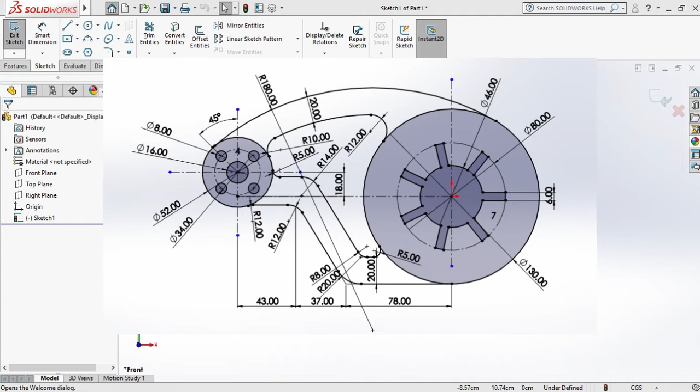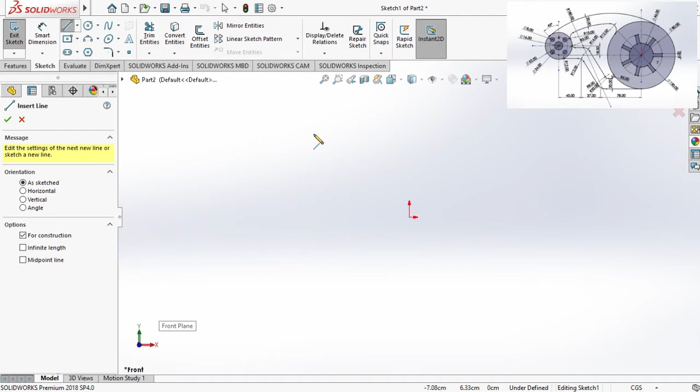So let's start. First, we're going to create a guideline using center line. We're just going to click center line right here, and then I'm going to use the front plane. Press the space bar and select front. I'm going to create a line here, and another line right here. By the way, I use the CGS, centimeter, gram, and second unit system.

Next, as we can see in the figure, we have 43, 37, and 78 on the down part, so we're just going to add them. We get 158, so this will be our guideline. We are going to click Smart Dimension, click this line, and make this 158.

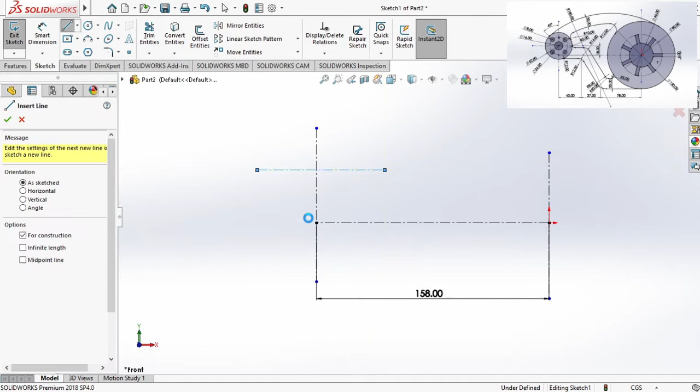Next, we're going to create another set of center lines right here, and another one. Again, we're going to make the Smart Dimension, clicking this and this. This should be 18, so we're going to put 18.

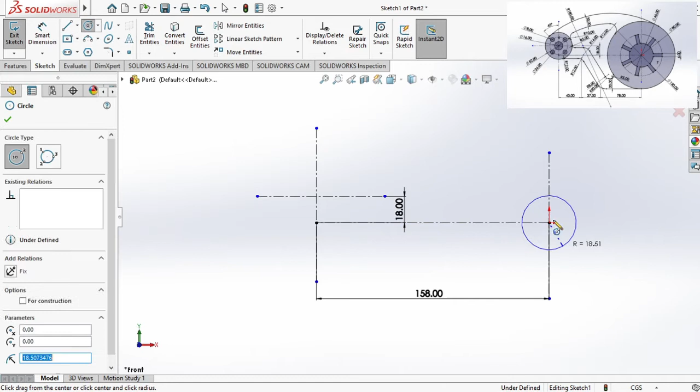After that, we are going to start creating the figure. First we start by doing a circle right here, 3 circles: 1, 2, and 3. To create the measurement that we need, we're going to select Smart Dimension and select the inner circle, which has a diameter of 46. So we're just going to put 46.

The second circle gets 80 as its diameter. Then the outer circle, which is 130 in diameter. So we can adjust this to leave some space right here, and also we can extend our guidelines.

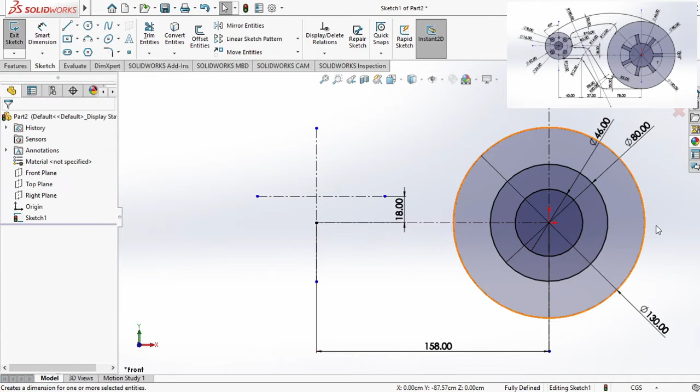Okay, we're going to create the hands right here. We are going to make it right here. After creating this rectangle, we're going to click the second circle and click construction geometry.

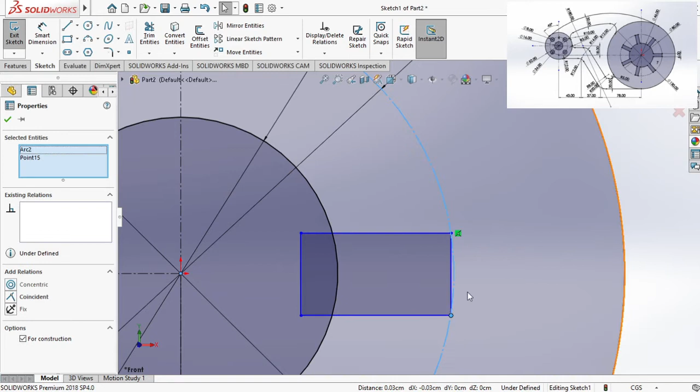After that, we're going to click this corner and the circle, then click make coincident. This corner and this circle, then make coincident again. So we're going to click Smart Dimension, click this line, and put 6.

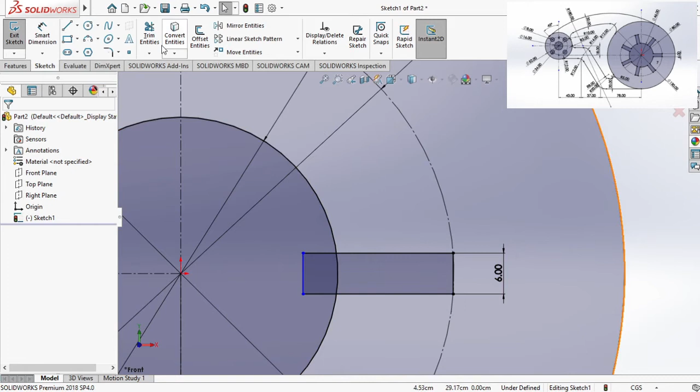Now we can trim this part of the rectangle, and this part. So we're going to click right here, here, and right here.

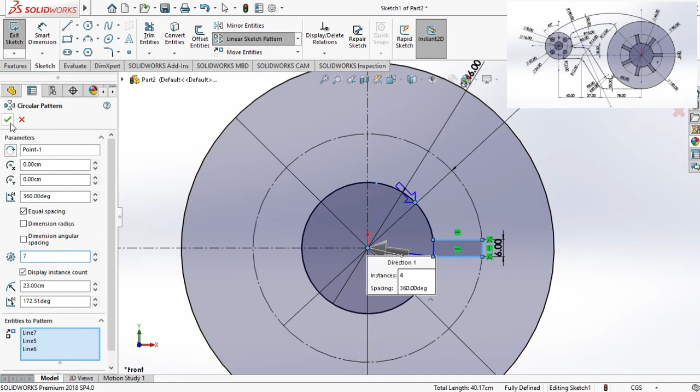Let's select circular sketch pattern. As you can see, there are already yellow lines. We're just going to change this to 7 because we need 7. Then just click check right here. After that, we are just going to trim the entities, and that's it.

Moving on to the next part, we have another circle right here from this side. First, we're going to select these two guidelines and click the intersection right here. Then next, we create the 3 circles that we need: 1, 2, and...

3. Next, using Smart Dimension again, we click the first circle and put a diameter of 16. We're just going to type 16, then the second circle with a diameter of 34, and the outer circle with a diameter of 52.

Next, like this part, the second circle right here, we're going to select it and make it construction geometry.

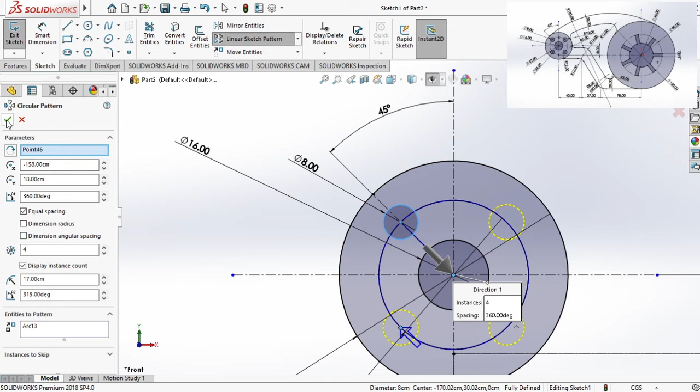So we're going to create the arc right here. We're just going to click arc and then zoom in a little bit from here to here.

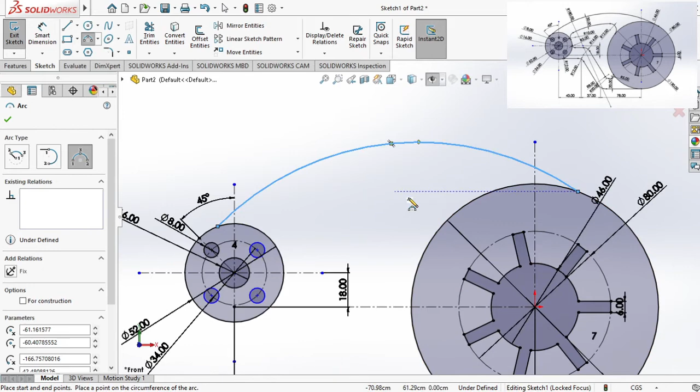Then we're going to click this line and this part of the circle and select tangent. And this part of the circle and this arc, tangent.

Okay, after that, we're going to fix the radius of this arc. So we're just going to select Smart Dimension again, click this arc, and put 180 as the radius.

So we're just going to select this arc again and select offset. As you can see in the figure, it is offset by 20 cm. So we're just going to change this to 20 and then click check. So here, as you can see, we have the offset.

So we're just going to move this dimension right here, and then we're going to trim the entities right here.

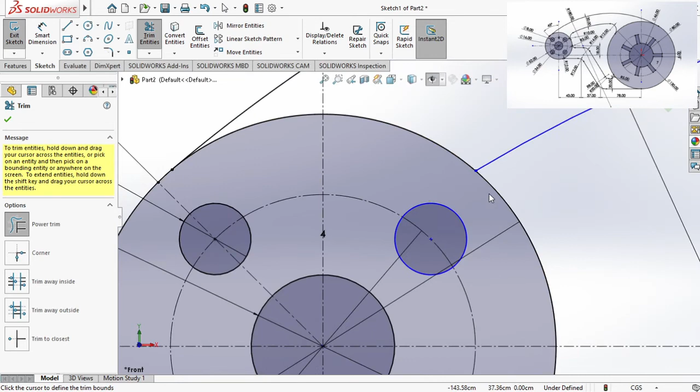After deleting all those lines, we're going to create an arc right here. So we'll just select here and this part of the circle, and then we are going to make them tangent, this line and the arc. Click make tangent and then repeat the process on this arc and this part of the circle and make them tangent.

So we are going to select smart dimension, select this arc and put radius 12, and then we can trim this part of the line, and then we're going to create another arc on this side.

So we're just going to click here and click here, and likewise we're going to select this arc and this part of the line, and then make them tangent, and then this part of the circle and this arc, and again make them tangent, and select smart dimension, click this arc and use 10 as the radius.

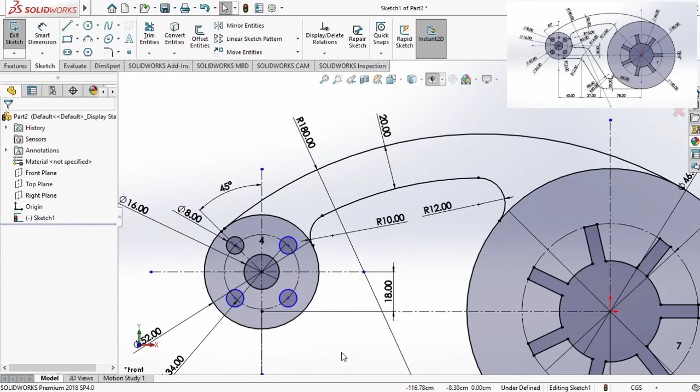And then we're going to trim this part. As you can see, the upper part of our figure is finished, so we're going to move on from the lower part. So next is we're going to zoom in right here at the bottom.

So you are going to create a line, select this line from the center bottom of this part of the circle, going right here, and then smart dimension, click this line and make it 78.

And then another line from here to here, smart dimension again, click this point and this point and make it 37.

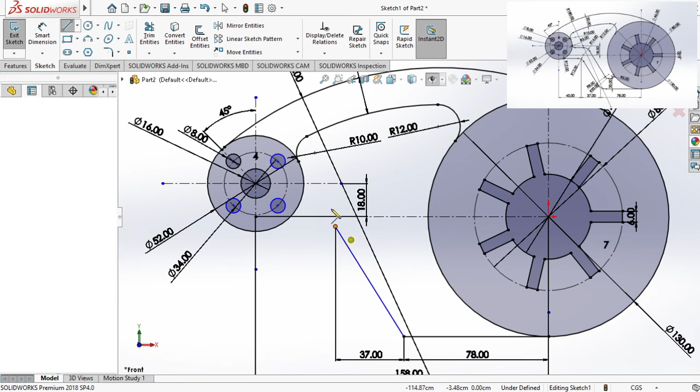Next, another line from here to this part of the circle.

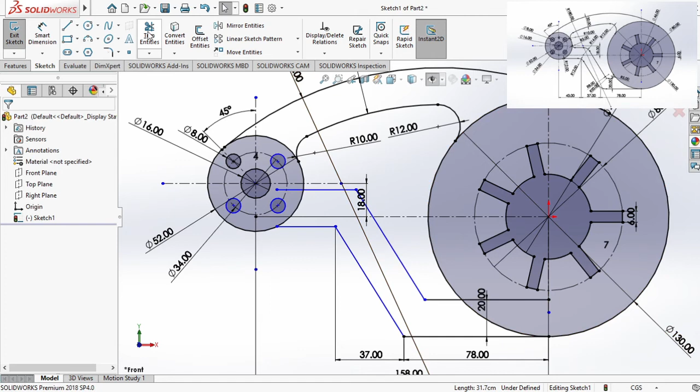Next is we're going to select offset entities, by 20 cm also, so we're just going to click OK right here, and then we're going to trim these parts.

And then we're just going to arrange. After that, we're going to fillet this side, so we're just going to click this line and this line, and then select fillet, and then our radius is 20, so we're going to change this to 20, then click the check.

And then also this part with a radius of 8, click the check.

Then next is fillet again this part with a radius of 12. Again on this part with a radius of 14.

Create an arc right here, so click this and this part, and then we're going to make them tangent, and then this and this arc tangent also, and then smart dimension, click the arc and put 12.

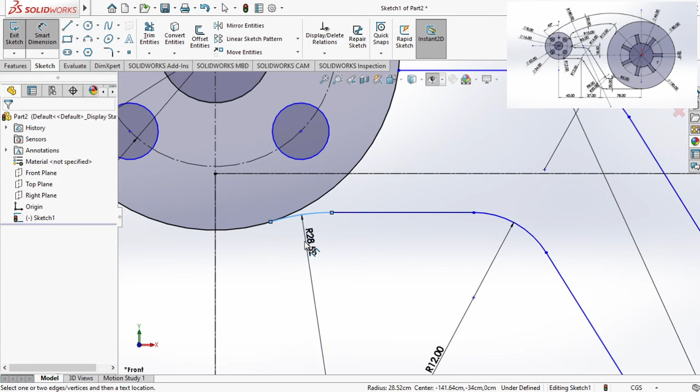Next is we're going to create an arc also right here, select arc and then click right here and right here. Likewise, we're going to select this line and the arc, and then select tangent.

And then another one, this side of the circle and the arc, click tangent again. We can trim this part. Select Smart Dimension, click the arc, and put 5 as the radius.

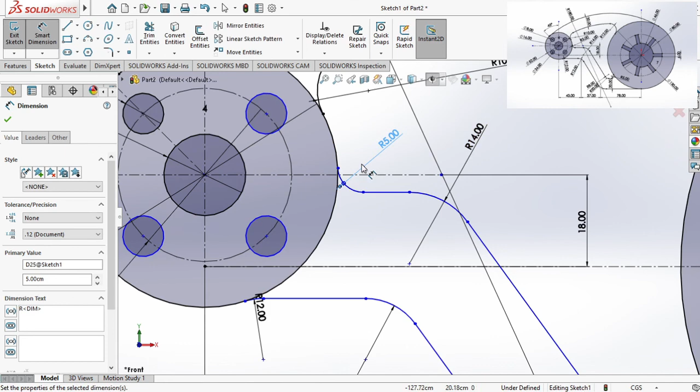Next is right here. We're going to put an arc here and here. Same process. We're going to tangent this side and also this side. Trim this part and then Smart Dimension, click this and put 5.

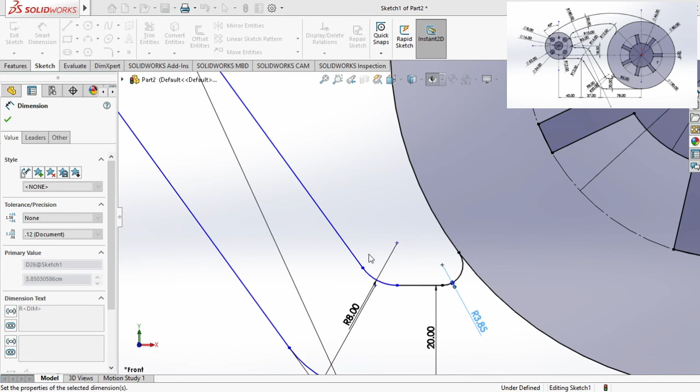This is our final figure and I hope you learned something about SolidWorks and its basic concepts. Although a while ago you can see at the bottom that our figure is not yet fully defined.